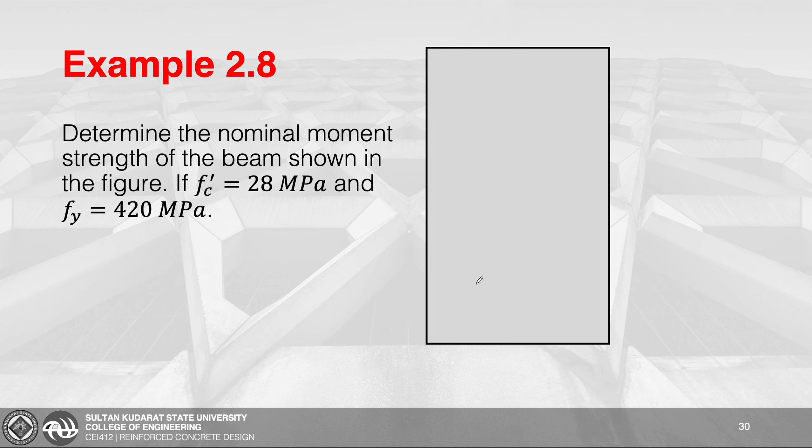So ito yung ating cross-section. We have a rectangular section here na merong tatlong 25 mm diameter na rebars sa tension side. So, yung width ng beam natin is 300 millimeters. Tsaka yung total depth ng ating beam is 500 millimeters. And yung effective depth naman na 430 millimeters. Then we have the steel covering na 70 millimeters.

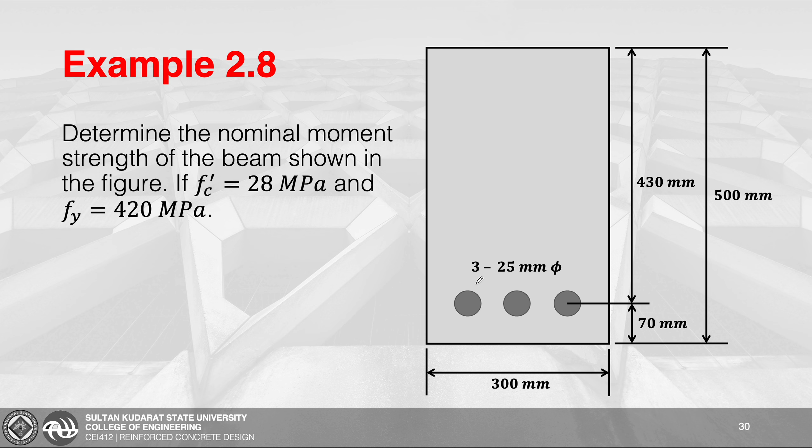For our solution here, first, we're going to project the location of our neutral axis, which is being represented by the broken line na red dito. After that, we're going to draft some construction lines as a reference. So we have here our c. Take note yung c natin dito, ito yung location ng ating neutral axis from the extreme fiber sa compression side.

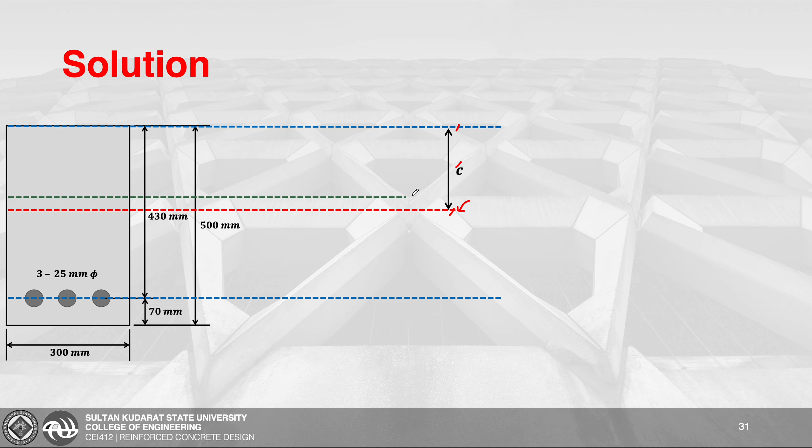And then we have another construction lines here or guidelines para sa ating depth ng ating compression block. Itong green naman na region, ito yung tinatawag nating area ng ating compression block. Ito naman yung equivalent na rectangular na stress diagram, and yung magnitude nito is taken to be 0.85 f'c, which was based from the ACI tsaka yung NSCP na provisions. And then we have here yung a, ito yung tinatawag nating depth ng ating compression block, and this is equivalent to beta sub 1 times c.

So, yung centroid ng ating area ng ating compression block is located dito sa center, because yung shape ng ating compression block is rectangular siya in section. So, dito sa centroid nito magpapass through yung resultant force natin na C. Yung C, ito yung compressive force na equivalent sa 0.85 f'c Ac.

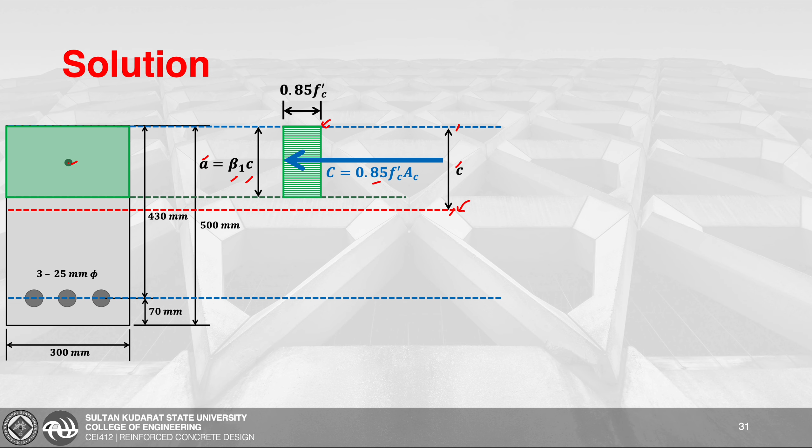Itong equation nito was derived using the stress formula from your strength of materials, na yung stress natin is equivalent to your force all over your area. Para makuha natin yung force, force is equivalent to stress times area. Yung stress dito is represented by 0.85 f'c, tsaka yung area naman natin ay Ac. So, yung location nito is a over 2. Kalahati lang ng a kasi nasa center lang ng ating compression block.

Yung next naman na resultant force is itong T. Itong T or tensile force is equivalent to As times fy. Ito yung resultant force galing sa mga steel reinforcement natin. Same pa rin yung principle: yung stress natin is taken to be fy, tsaka yung area shall be the area of our steel. This is considering na mag-yield yung ating mga steel reinforcement.

Then we have our effective depth, d, which is taken from the centroid ng ating mga steel reinforcement papunta sa extreme fiber sa compression side. So, we have here another distance. Since meron tayong effective depth dito, kung babawasan natin ng a over 2, we may be able to get the distance between the two forces C tsaka T. And this shall be taken as d minus a over 2.

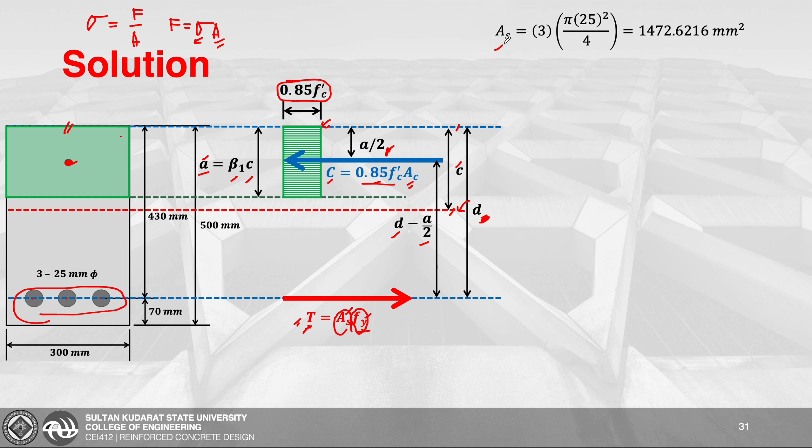So first, isolve muna natin yung total area ng ating steel. This is equivalent to 3 times pi times 25 squared over 4, which is 1,472.6216 square millimeters. After that, by equilibrium of forces, T is equivalent to C. By substituting, T is As times fy, tsaka C is 0.85 f'c times Ac. Since rectangular yung compression block, the area of our compression block is a times b.

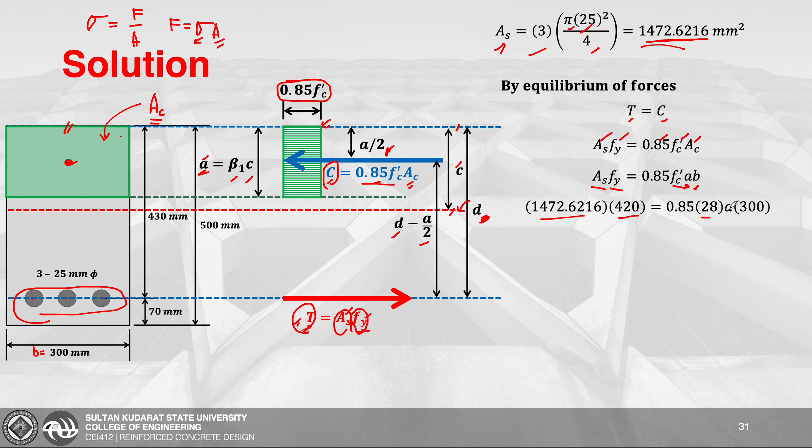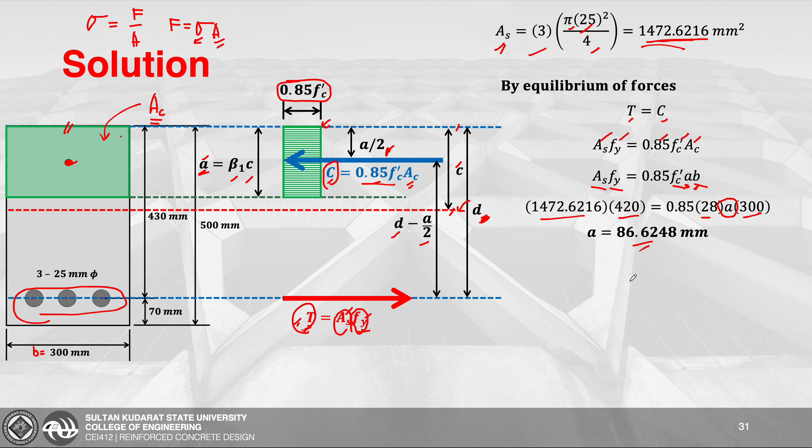So by direct substituting the values for As, fy na 420, f'c na 28, tsaka b na 300, we will now be able to get the depth of our compression block, which is equivalent to 86.6248 millimeters. After that, we're going to sum up the moments about the centroid of our compression block.

Kung dito tayo mag-sum up ng moment, hindi na natin mako-consider yung C sa calculation. So, yung nominal moment will be T times d minus a over 2, in which T is As times fy. By direct substituting, As na 1,472, fy na 420, d na 430, minus a na 86.6248 divided by 2. Large yung value, so we divide it by 10 to the power of 6 para ma-convert siya sa kilonewton meter. Our final answer will be 239.1667 kilonewton meter. Ito na yung ating nominal moment.

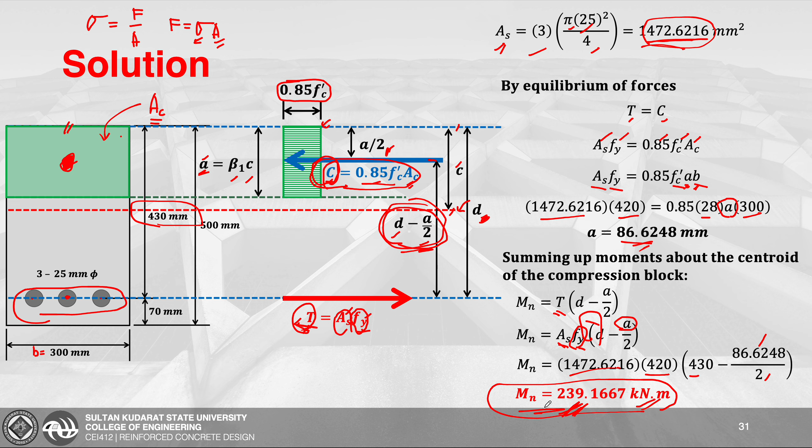Now, meron ditong alternative. Pwede rin tayong mag-sum up ng moment sa centroid ng ating steel reinforcement, and we're going to make use of the C force times yung moment arm niya na d minus a over 2. Pwede natin ito ma-counter check para ma-verify yung nominal moment natin.

So yung C natin is 0.85 times f'c na 28, times yung area ng compression block, a na 86.6248 times b na 300. Then we multiply this by the moment arm: d na 430 minus a over 2, 86.6248 divided by 2. Then divide by 10 to the power of 6. So, yung answer natin is 239.1667. Na-verify natin na tama yung na-solve natin na nominal moment when summing moments about the centroid ng ating compression block.